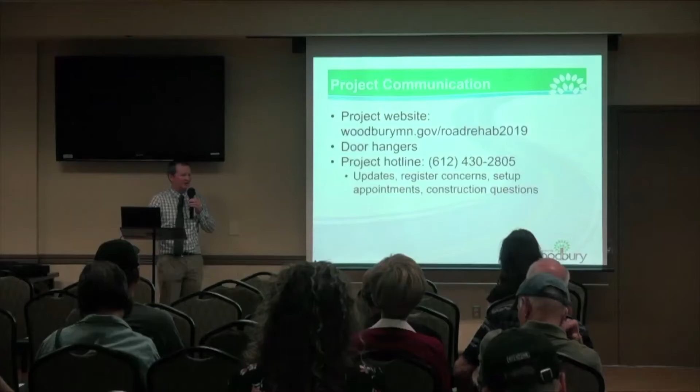We sent out some postcards that had this phone number as well. Otherwise, you can copy it down and put it in your phone right now. This is going to be the number to call if you have any specific construction-related questions, comments, or anything. Those calls are answered by Bolton and Menk, and they'll be directed to the right person. So that's an important phone number to know.

So we'll go over the phasing here. This is preliminary phasing - the contractor has come up with this, and we finalized it within the last week or so. Phase 1 areas are going to start here in May. It'll start the week after the garage sale, so they'll be out doing some minor work before that, but for the most part construction will start the Monday after the garage sale, so you won't have any problem navigating the roads.

Phase 1, this red area, will run from May to June. These phases are going to be 6 to 8 weeks approximately, so it's hard to know exactly when phase 2 will start. They'll wait to start phase 2 until after phase 1 is complete, which is why we don't have dates set in stone after the phase 1 start date.

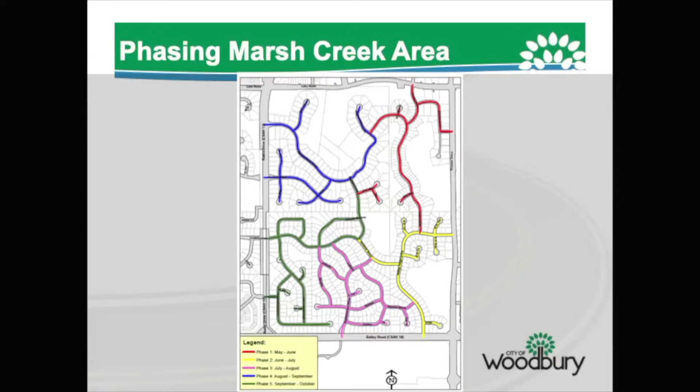So phase 1, as you can see, includes Northview Lane Road, Torrey, and Juniper Lane. Those are the major roads included with phase 1. This is also available on our website if you wanted to see a bigger blow-up of where we'll be, and In Touch will update you as the schedule changes, which it very well essentially will. It's too hard to predict exact timelines as far as weather delays and other construction issues that come up.

Each phase is about 6 to 8 weeks, and this is the general timeline they'll follow. The first week will be mobilization and traffic control, putting up signs notifying what kind of construction impacts to expect. Then there'll be 2 to 3 weeks of removing and replacing damaged curb. We'll go over in a bit the areas experiencing full curb replacement - those are the areas with the most impact to your properties and driveways, but we'll cover that a little later.

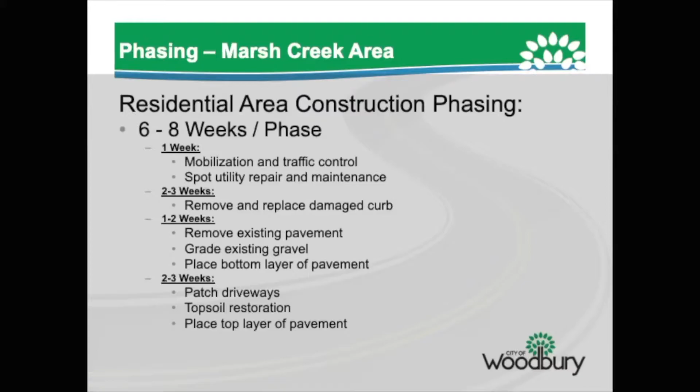After they remove and replace the curb, they'll start with the roadways. First they'll remove the pavement and then grade it, place the bottom layer of pavement, adjust some manholes, patch the driveways, do some topsoil restoration, and finally put the top layer of pavement on. They do the top layer last, and as soon as they're done, they won't haul any large vehicles on it because it's sensitive until the first few cold days. So they tend to stay off the top pavement as long as they can. This is the general timeline we can expect.

So I will say that we will always maintain access to your houses.

You may or may not be able to get into your driveway at all times, but you will be able to at least park on the street and be able to walk on the street. The road will be gravel at some points, but it'll be drivable. It'll be a little bumpy, a little dusty. Inconvenient is probably the best way to put it, but you'll be able to navigate the roads throughout the entire construction process.

These are the areas where we're going to have full curb replacement. As you can see, there's some areas where it's pretty extensive. We've got a lot of areas on Marsh Creek Road, Marsh Creek Alcove, Northview Lane. There's lots of other ones. Ashford Road, Featherstone are some of the big ones, Beacon.

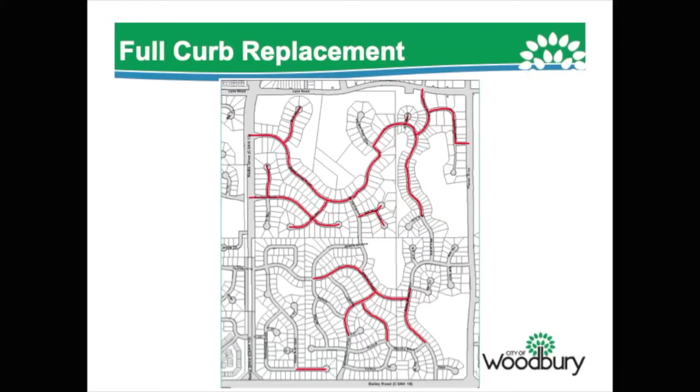These are the areas where we're pretty much going to be impacting your driveways and your yards. By yards, I mean the first 3 to 5 feet of your yard, they'll have to do some work in there. So if you have irrigation, dog fences, other kinds of landscaping, the resident is responsible for removing those to give the contractor room so they can put the curb in.

If your street is not highlighted, that doesn't guarantee you're not going to have any curb work. These other areas are going to have spot curb repair, and those will be marked a few weeks prior to construction by the consultant. If you have the white paint, which we'll go over in a bit, Jeff will show you what that looks like. If you have white paint on your curb, that curb is going to be coming out as well. So if you have any irrigation, you'll be responsible for that too - irrigation, dog fences, anything like that. If you have questions about whether something is going to be impacted, that's another reason to call the hotline.

So we'll go ahead and show a video. We've shown this at a few other neighborhood meetings, so if you've been to some, you've seen this before, but we'll show it again just so you have an idea of what to expect when the contractor starts construction on your street.

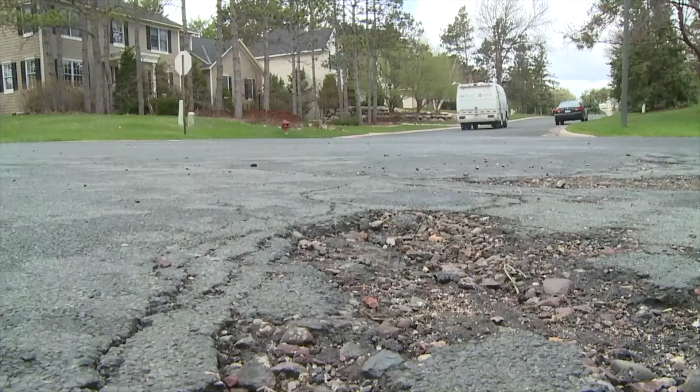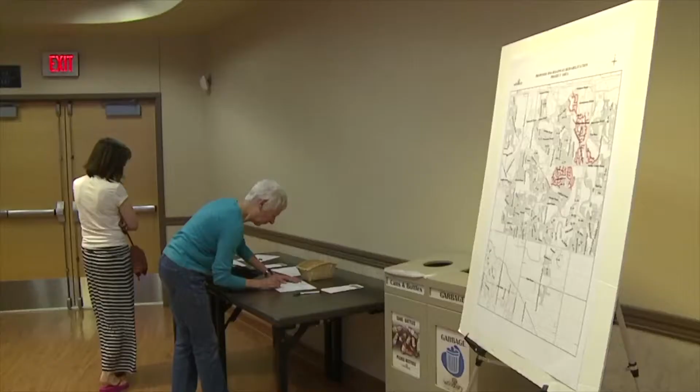Every year, the city improves sections of neighborhood streets in a variety of areas of Woodbury. Most of the roads are in residential areas, which is why city staff conducts a series of neighborhood meetings, open houses, and public hearings related to the roadway rehabilitation project. Residents attending these meetings have the opportunity to learn about the construction process, special assessments and funding, how it will impact them, and ask questions about the project.

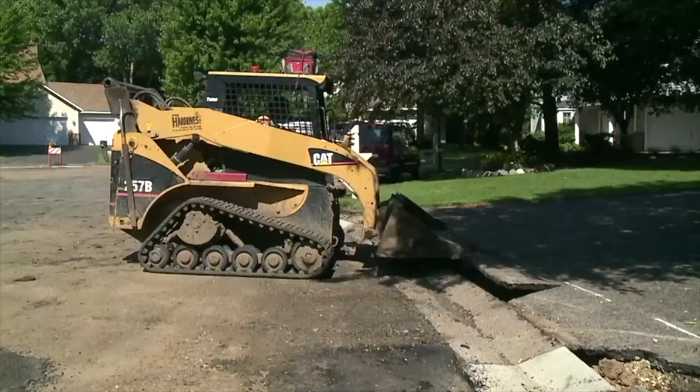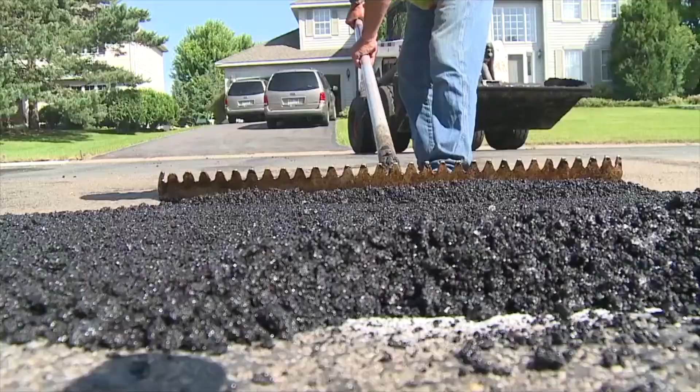Special assessments are a charge imposed for improvements that benefit nearby properties. The amount of the charge bears a direct relationship to the benefit the property receives and is based on the city's assessment policy. Assessments are used as a partial project funding source in addition to general tax revenues and other sources. Once the project is formally approved by City Council, construction begins.

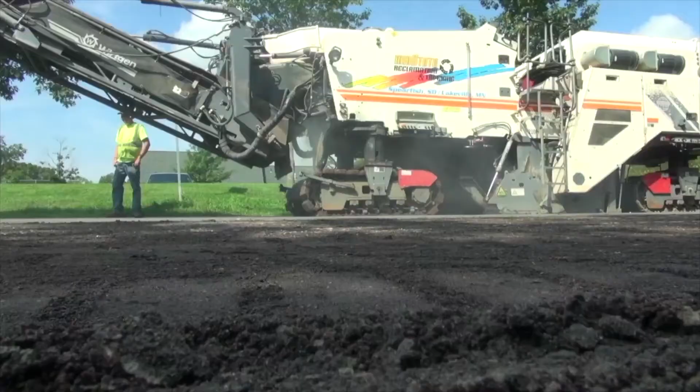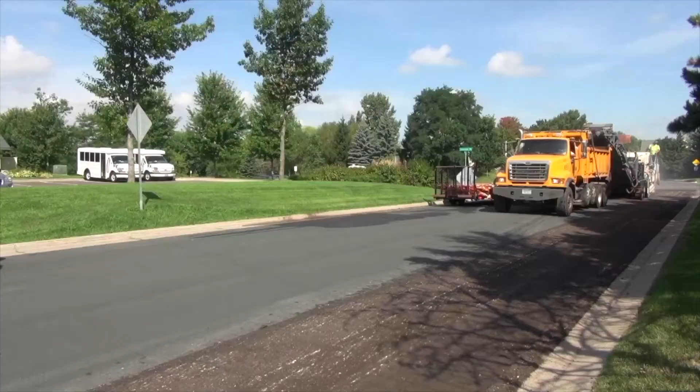The first step in the process is removing portions of the old pavement. A milling machine proceeds slowly down the street as it removes the top surface of the pavement, leaving a rough but drivable surface. In most cases, the roads remain open to traffic through the milling process.

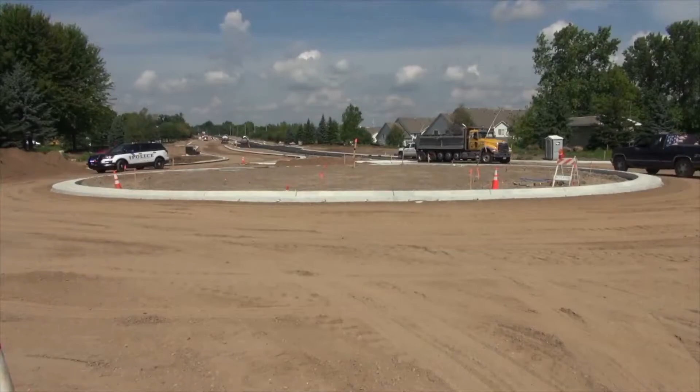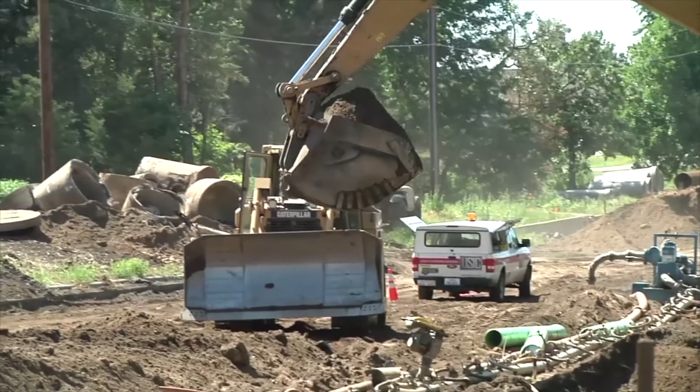Depending on the location of the project, utility improvements might be done in conjunction with the roadway work. These improvements include sewers, water mains, natural gas lines, and communication cables. Utility work requires extensive digging and usually results in temporary lane or roadway closures. Motorists should be aware of detours in these areas.

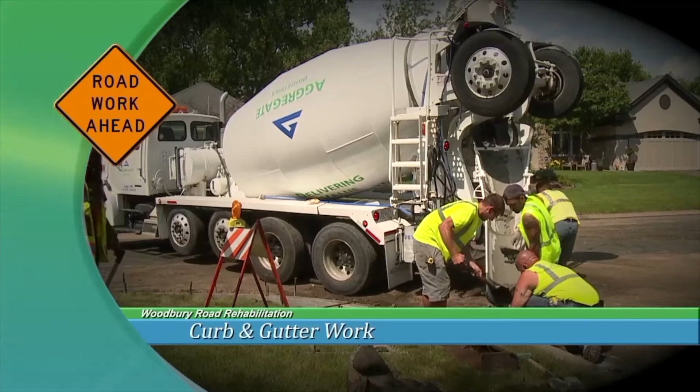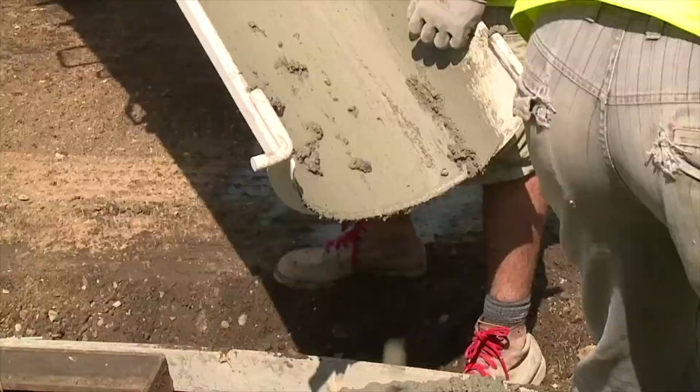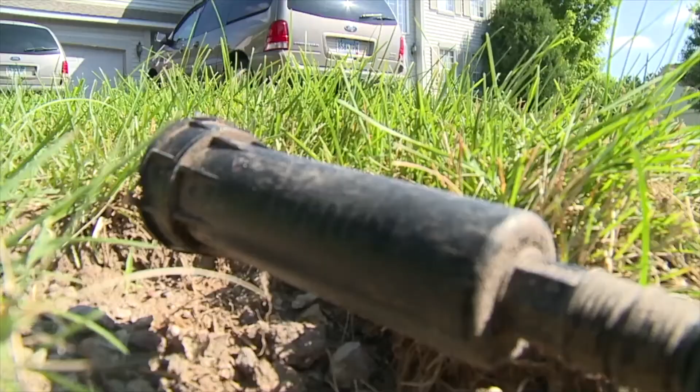All projects involve curb and gutter work. Approximately 1 week before curb construction, sections are evaluated and marked for removal. If your curb needs to be replaced, you will be notified and given information on how it will impact your residence. During construction, any irrigation systems, dog fences, or other private features within the right-of-way will have to be moved by the property owner. Asphalt driveways damaged during curb replacement will be patched. Damaged concrete driveways will be removed and replaced.

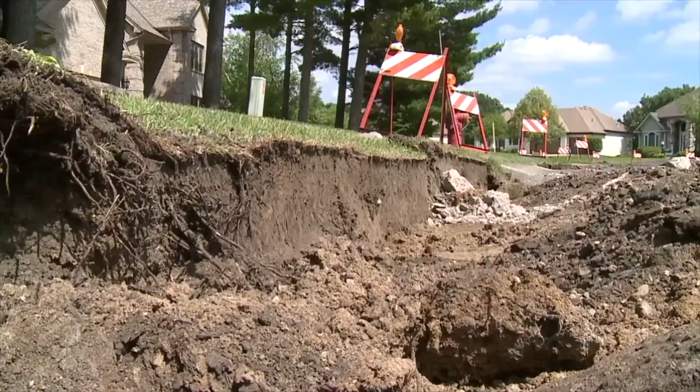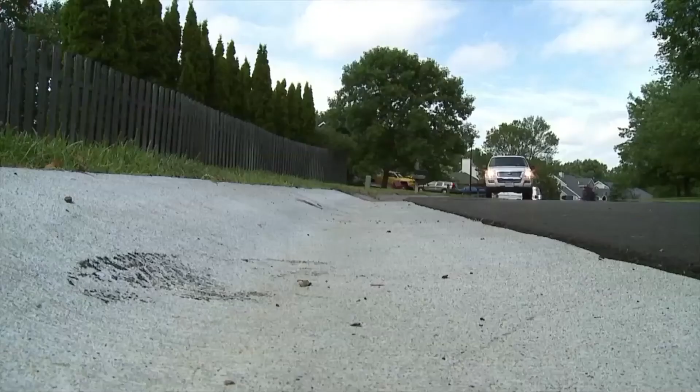Curb work will also impact your lawn. The contractor will replace disturbed areas with seed and hydro mulch, and will care for the area for 30 days. Residents are encouraged to water and care for the areas to achieve the best results. Once curb work is completed, it cannot be driven over for 5 to 7 days.

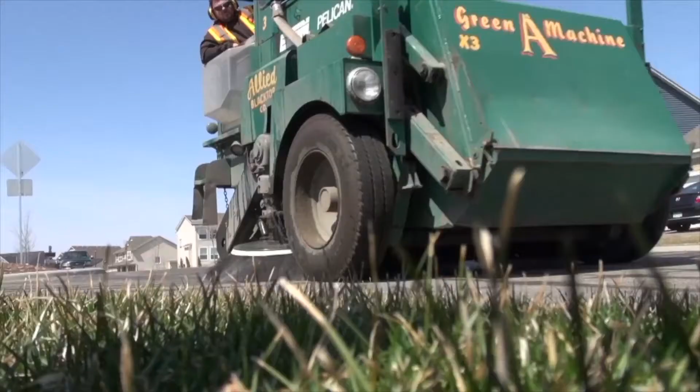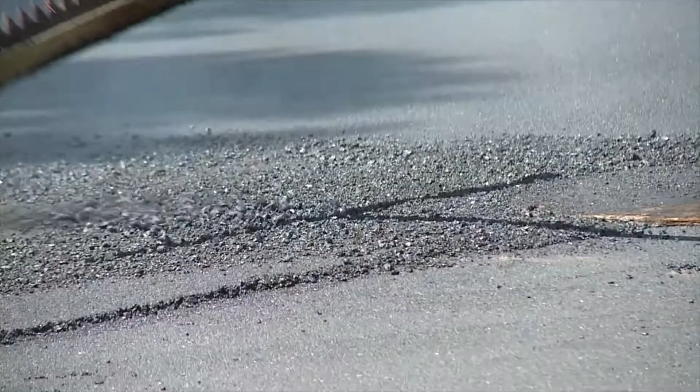Prior to final paving, the street surface will be thoroughly swept. After this step, the final pavement process will begin. Before the new asphalt is laid, tack oil is applied to the road. Residents should avoid driving on the tack oil because it can stick to driveways and vehicles. With the tack oil in place, crews will then begin the paving process. After the new asphalt is rolled and has cooled, it is immediately ready to use.

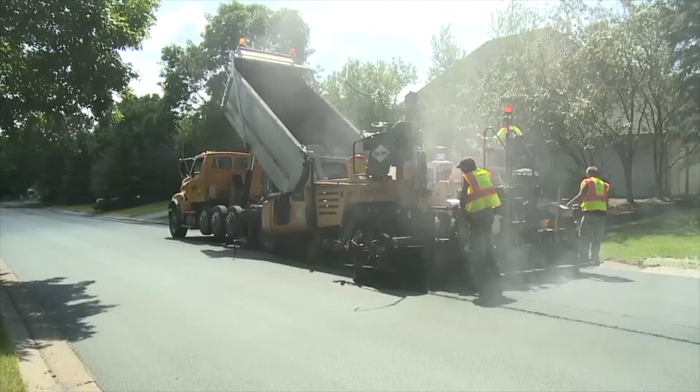If you have any questions regarding the project process, assessments, or the scope of the project proposed for your neighborhood, please contact the City of Woodbury Engineering Department at 651-714-3593.

All right, so that video gave you a general idea of what to expect. We've talked a little about phasing and construction schedules, but the one thing we can guarantee is that the schedule is going to change. We can't control the weather. If we get a 4-day stretch where it rains every day, you can basically assume everything's going to be pushed back a week. We just want to emphasize that there's going to be some inconveniences. We're going to work as hard as we can to make this as smooth as possible for you guys, but there's just some things we can't avoid.

In the construction area, it's going to be a gravel road for a little bit there, which means it's going to be dusty. So somebody had asked me about replacing windows. I would recommend not replacing any windows if we're doing your road during that time. It'll also be noisy, with a lot of construction vehicles out and about.

Right now the contractor's working hours are 7 a.m. to 7 p.m. So we're trying to limit the noise as much as we can, but at the same time they have to get the work done.

In the construction zone, we want to make sure you guys are patient with the contractor. They're working as fast as they can, but we want to encourage people to avoid getting too close to any equipment. The school buses will have access, but we'd encourage the students to stay back far off the curb, because the construction vehicles will be starting at 7 a.m. So there's going to be some conflicts there, and we just want to make sure people are aware that as long as the kids are staying off the curb, they'll be just fine. I guess as they should be anyway.

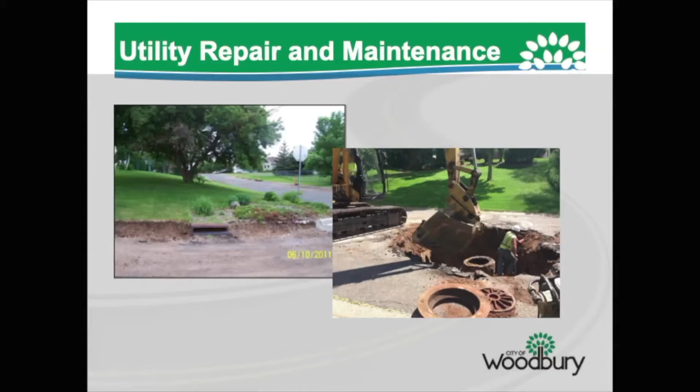The picture on the left shows a storm inlet. With this project, we're going to be doing some work with pretty much every one of them within the project area. So if you have one in your yard, those are usually the areas of largest impact, because we usually end up having to dig at a minimum of about 4 feet behind them. In some cases it ends up being a bit farther if we're doing a full structure replacement.

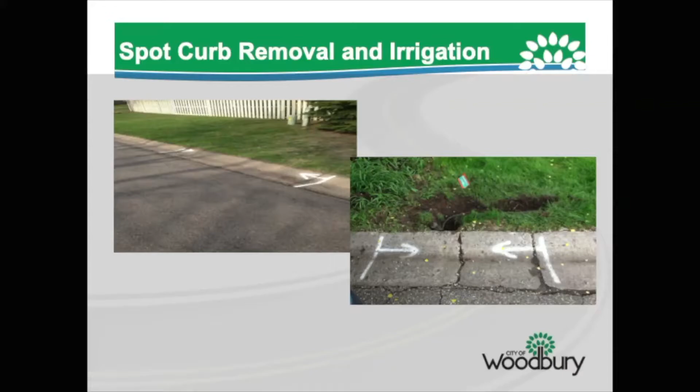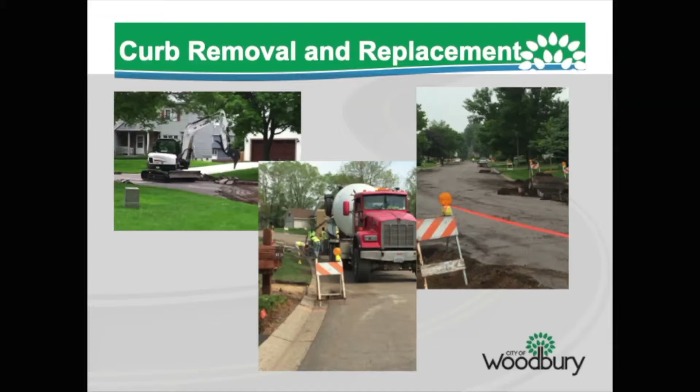Here you can see down the street the equipment used to remove the spot curb panels, and a crew coming behind doing the concrete placement. In the spot curb areas, panels are typically removed and replaced the same day or the following day, so it's a pretty quick process as they work their way down the road.

When there's a switch from the temporary mailbox back to your existing mailbox, please check both mailboxes to make sure you get all your mail and nothing's left in one or the other.

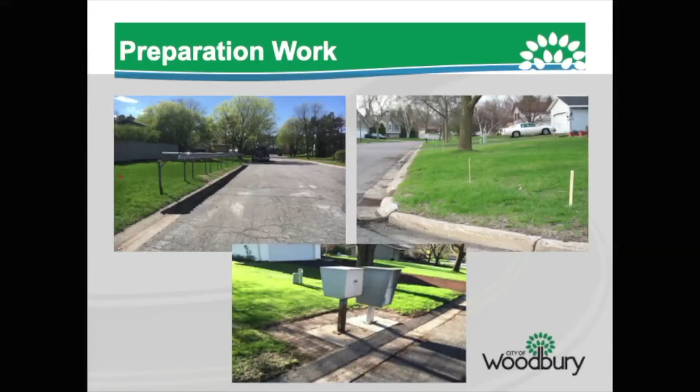There are some of these in the Juniper area. Service will continue to those mailboxes throughout construction. The boxes themselves will be picked up and moved while the concrete removal work is going on, and then put back into place after construction.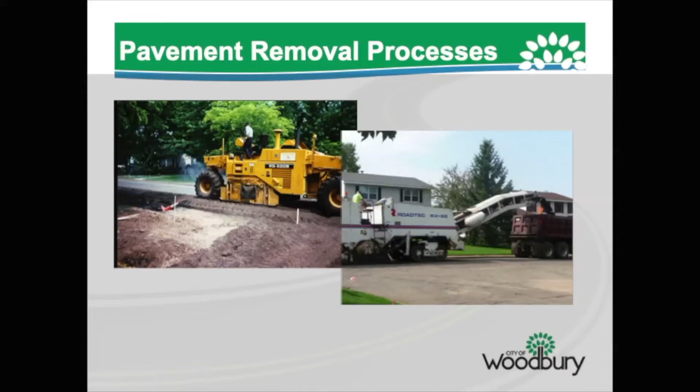Here's a couple examples of the pavement removal machines. As you can see, these are rather large machines with blind spots, so keep that in mind during pavement removal. If you have kids playing in the neighborhood, make sure someone's watching them and that they understand they shouldn't be running around the equipment. These contractors and truck drivers are aware of kids in the neighborhoods, and this contractor has done many of these projects over the years, so they pay attention and look out for people. But it's still important to keep track of your kids, especially when we're working in your phase.

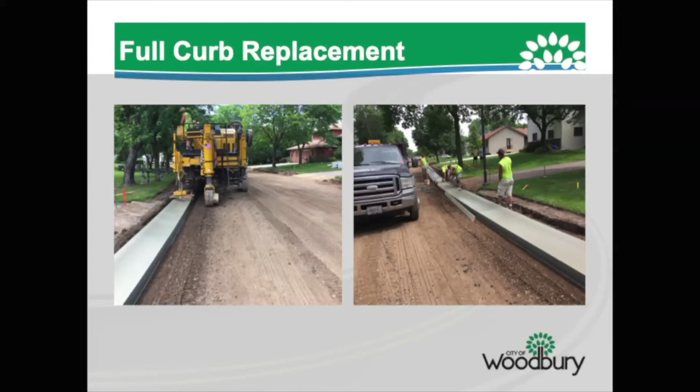This picture shows full curb replacement in front of a driveway. You'll see a similar style curb if you live in the full curb replacement areas—the new curb going in has more of a vertical face. Its height is basically the same, so it still carries the same amount of water, but at the driveway you'll notice a bit of a cut down on the back, giving a smoother transition than what you experience now. So if you don't like that bump in front, with full curb you'll notice a change—there'll still be a bump, but it'll be a smoother transition.

When the curb is placed, there's a period of about 5 days before you can drive over that new concrete. It's the same with the driveway placement. Anywhere we're doing full curb replacement, we're going to be putting a little concrete driveway apron, about 5 feet deep, that'll go behind the new concrete curb.

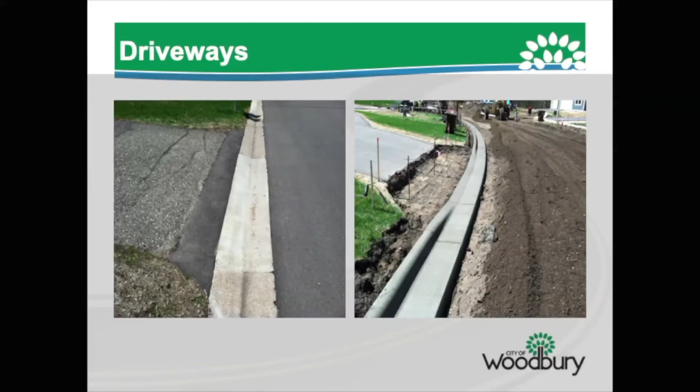If you're in the spot curb areas, what you're going to see is if your driveway is impacted, if we got a panel in front of it, we'll do a patch behind it. If you have an asphalt driveway, it'll be an asphalt patch, about 2 feet roughly in width. If it's a concrete driveway, lots of times we can remove them panels out in the spot curb condition without impacting your driveway.

Once all the concrete work is done, you'll see them come out with some large vibratory equipment. This equipment is going to be used to compact that gravel base material. You also will see similar equipment when they're placing the pavement. You will notice that there will be some vibration in your house that you will be able to feel.

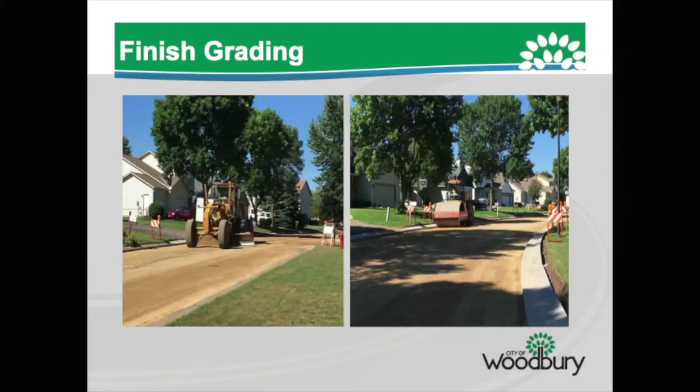If you have any valuables, I'd recommend if it's something that's a small trinket, you might want to take that off the shelves while this work is occurring. Typically we don't have problems with stuff falling off walls or shelves, but if you have something that's really valuable, you might want to do that just to be safe.

One question that does come up lots of times: well, with this vibration, does it wreck my house or cause any damage to my foundation? The vibration that these have, it will not, or it should not, affect your house as far as any foundation damage. But like I said, you will feel the vibration in your homes.

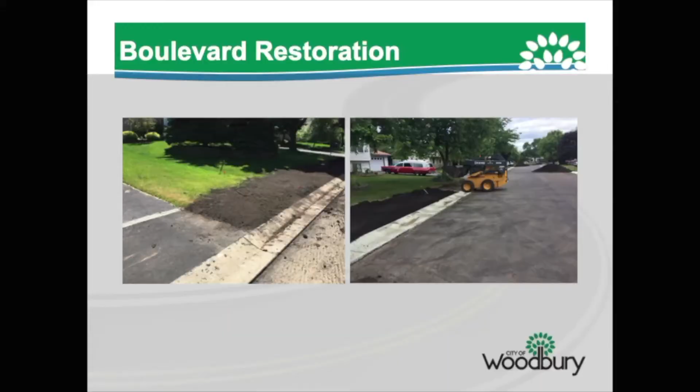After the first layer of pavement gets placed, the contractor will be placing topsoil in all the disturbed areas, then seed, usually a few days right behind. Once this topsoil goes down, this would be the opportunity to reinstall any irrigation systems yourself, since you've got nice light topsoil to work with. Otherwise, you could put it in before the topsoil gets placed, and the contractor will work around your irrigation heads once they're in place.

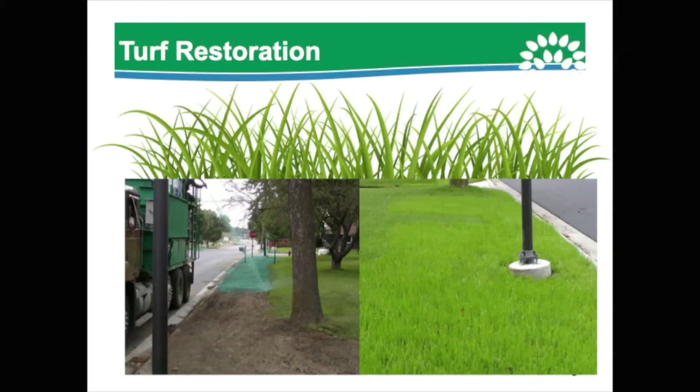After the seeding is done, we do an inspection, and if there's a large amount of non-growth, the contractor will come back and reseed areas. That inspection doesn't occur until a little bit over a month after the seed is placed, because the contractor has a window to try to get that initial growth in the area. If there's spots done later in the year, in some of the later phases, lots of times that seed will be placed late enough that we'll hold off doing an inspection until the following year. So if you're in one of the later phases and don't see growth right away until the next spring, keep in mind the contractor will likely be coming out and doing some of that corrective work the following spring.

Typically, when pavement is placed, you're going to be able to drive over this asphalt within about 30 minutes from when it comes out of the paver. The large rolling equipment that follows it will compact it to a point that you'll be able to drive over it and not scuff it up, unless you start turning your wheels very sharply while parked in place, in which case you will dig into the hot pavement the first day it's placed.

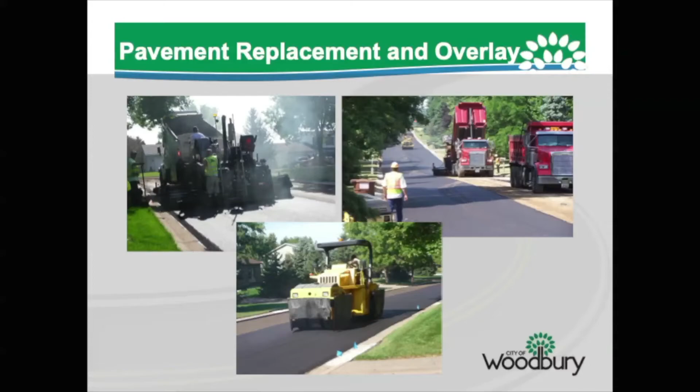But as long as you're not cranking your steering wheel in place, you'll be just fine, and it won't leave any scuffs. The scuffs that do get left, typically they're not detrimental to the pavement because they're usually very thin, but they will stick out because you've got this nice, perfectly smooth surface. A minor scuff in the surface, you won't notice it after a few years. It'll kind of fade away.

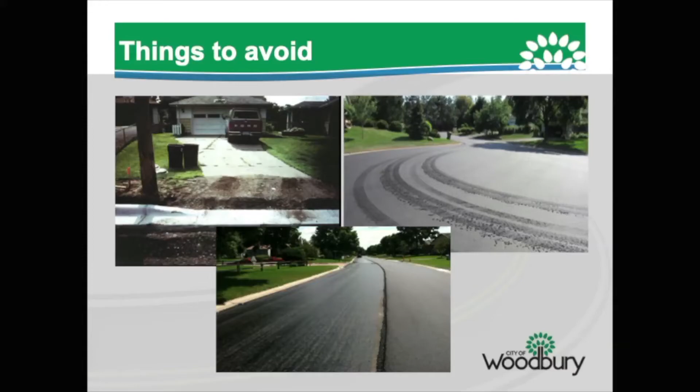In the bottom picture, the video talked a little bit about tack. It's basically a black glue, kind of an oily substance that gets placed between the two layers of pavement. They'll spread this out over the pavement directly in front of the paving operations. You want to avoid driving over this material if possible, because it will stick to your tires, and if you drive over it and up into a driveway, it'll track it up into your driveway.

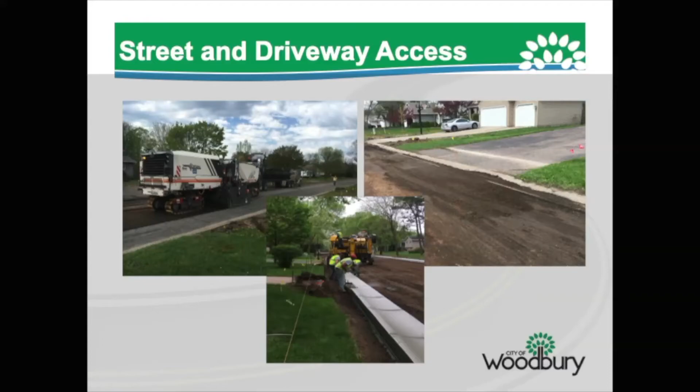I'll turn it back over to Mike here. So the schedule is the contractor will start May 6th, which is the week of the garage sale, and they'll be just doing some minor work, like saw cutting, nothing that's going to have any impacts on navigating the roads.

They're projected to be done by the end of October. Of course, this is best case scenario, so there's certainly a chance they end up going into November, depending on how the weather goes, how the fall is. Last fall we had a very wet fall and things got pushed back a little bit, so if we run into something like that, then we'll have some more delays.

So this is as best we can give you for now. If you want the most up-to-date information, as we've talked about before, the in-touch notification is the best way to stay informed.

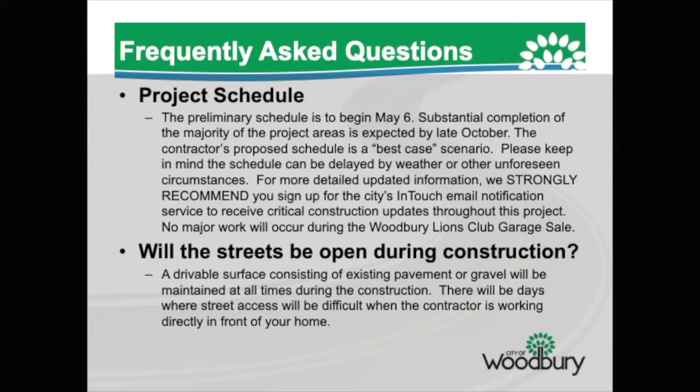The streets will remain open. We'll allow access for mail trucks and garbage trucks and school buses, any emergency vehicles. All of that will be available throughout the entire construction project. You'll be able to drive in and out of the streets, it's just the driveway access that's going to be restricted at some times.

The contractor's working hours will generally be 7 a.m. to 7 p.m., Monday through Saturday. There are some times where they may need to start a little early or work a little past 7 o'clock, depending on what they're doing that day. If there's a close wrap-up point and they need to work an extra hour and a half, the city ordinance does allow them to do that. We certainly don't want to make a habit of it, but just be aware that if they work past 7, they are allowed to do that.

Driveway access, like we've talked about, there would be some times if you're in the full curb repair areas that you'll be without driveway access for probably five to seven days to let the concrete cure. There will be street parking available at that time, so you'll still have access to your house.

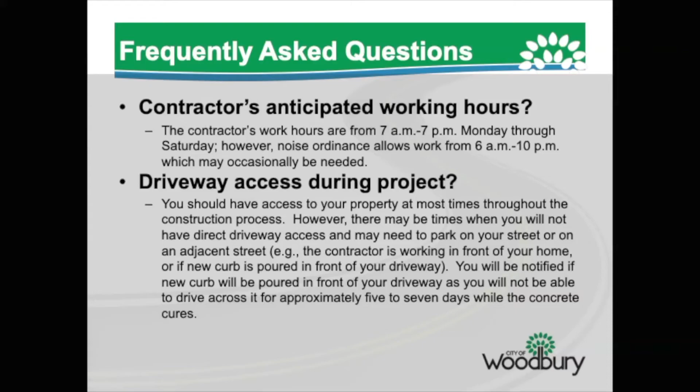Garbage and mail service will be maintained throughout construction. There'll be some temporary mailboxes, but it should be pretty much as normal. On garbage day, make sure you pull the garbages a little off the curb if you're in that curb rehabilitation area.

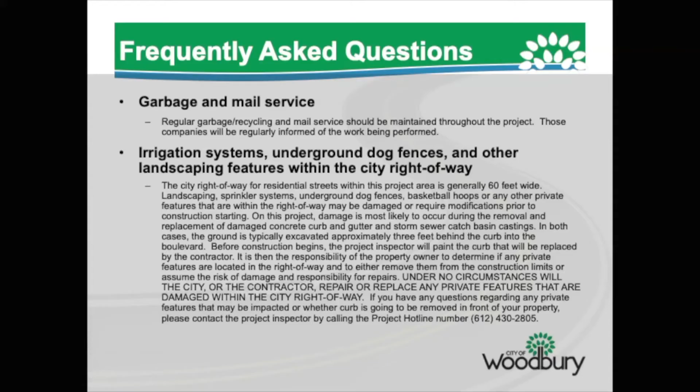Probably the big one is irrigation systems, underground fences, dog fences, and landscaping. This is the one we emphasize. The city right-of-way extends into your yards a little bit, and that's where we'll be doing curb work. When we impact the 3 to 5 feet off the back of your driveway or off the back of the curb, the resident is responsible for removing the dog fence and the sprinkler. Anything that is damaged, we won't reimburse you for, and we won't be able to repair anything. So just be aware of that. You're responsible for removing any of that prior to the curb work.

We'll have door hanger notices a few weeks before that will give you all the same information. If you have any questions, feel free to call the hotline. If there's something you're not sure whether it's going to be in the way, the hotline is the way to go, and that's at the bottom here.

The contractor will also be responsible for turf restoration whenever they impact your yard. They'll come in, seed it, hydro mulch it, and maintain it. We do ask that you help, since their requirements generally aren't as good as the homeowners'. If you want your yards to look as good as a lot of the properties in this area look, you'll need to help with watering, pulling weeds, and things like that. But the contractor is responsible for establishing some turf. If things aren't looking good, feel free to contact the hotline and let them know. But give them a month or so — that's as long as they have to establish it.

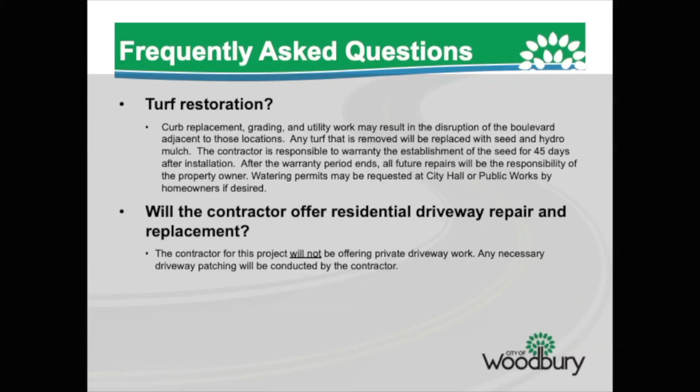A lot of questions come about driveway repair. The contractor will not be doing that. Their equipment is large enough that it's just not very efficient for them to try to do individual driveways, so they usually stick to just doing streets — it's a bigger, better bang for their buck.

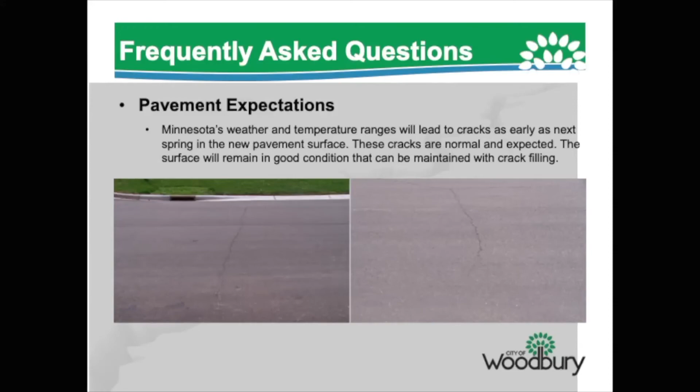As for pavement expectations, you'll get the fresh mat this year, and next year we'll probably have some cracking, which is expected in a climate like this with such extreme weather and temperature changes. We'll have some cracks by next spring, so we'll do some crack sealing and a pavement rejuvenation oil treatment in 2020, to hopefully prolong the life of the pavement and make it last 15 to 20 years minimum, hopefully 25 years.

We also wanted to give you a heads up on other projects going on in the city this year. Some of you might be aware, if you've been to other neighborhood meetings, that Meadowood and Upper Afton Road will be under construction. Upper Afton Road will have closures throughout the summer, phased and closed in 4 different segments — essentially Upper Afton Road between Weir and Century will be closed to through traffic throughout the summer.

The county also has some projects: Bailey and Bailey Frontage Road, the stretch of Bailey between Pioneer and Woodbury Drive. There will be access for the most part, but there will be 3 or 4 weekend closures where you won't be able to access Bailey Road between Pioneer and Woodbury Drive. There's a link here at the bottom directing you to information to get updates on when those will be.

The Radio Drive pedestrian bridge, along Radio Drive between Oakdale and Woodbury, crosses I-94 — that's a county project, and if you follow this link at the bottom, it'll give you more information. Then there's the Radio Drive trail extension, which will have some lane closures, but there shouldn't be major impacts along Radio Drive during that project. And finally, there's the I-94, 494, 694 interchange that most of you are probably familiar with — this link at the bottom will direct you to MnDOT's site for the best information.